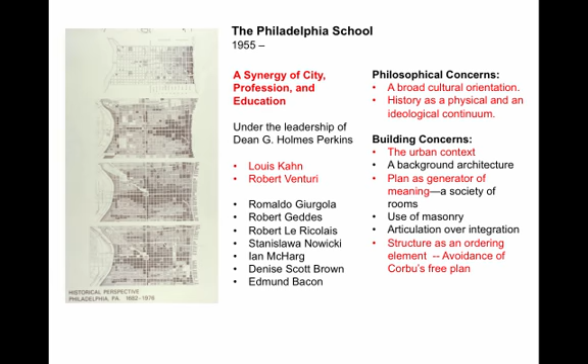Kahn graduated in 1924, just when the Beaux-Arts was fading. He was totally not exposed to modern architecture, never mentioned in school. But one of his classmates was the first American to go to Europe and work for Corbu, and brought back all these books. And so Kahn says of the 1930s, I lived in a city called Corbu. Now, after he graduated, the country entered the Great Depression, and there was not a lot of work. So Kahn is a very late bloomer, and his early buildings were extremely undistinguished.

So he had a Beaux-Arts education. The principles that you understand from the École des Beaux-Arts adopted for American schools. And we can say objectively Penn was the best Beaux-Arts school because the Beaux-Arts system worked on competitions. All the best student projects were sent to New York to the Beaux-Arts Institute for a competition, and Penn won more medals than the other schools.

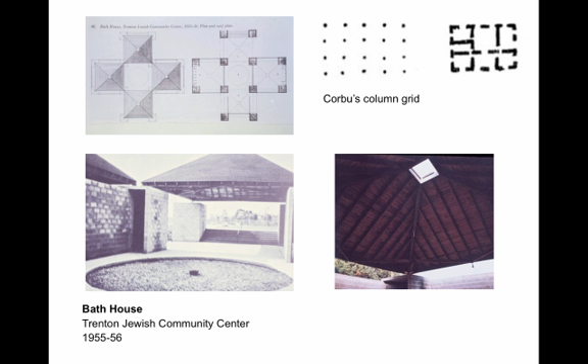So in this little bathhouse, just where you change into your bathing suit going to the pool, these forms here are the structure. They're huge and they're very defining. And then he emphasizes that definition by these pavilion-like roofs.

So, our first important building is going to be the medical towers. Now this has a very long name, the A.N. Richards Medical yada yada yada, which, forget it, it's the medical towers. And there's actually 2 wings to the building. All we need to know is medical towers, 57 to 61 in Philadelphia, University of Pennsylvania.

And here you see this articulation that we did not see in Mies. Mies is putting the skin over it, and Kahn is letting it all hang out. And we're going to see that this articulation is not arbitrary. Where does it in fact come from? So, here again is Mies fitting everything into the skin, and here is Kahn making everything bulge out.

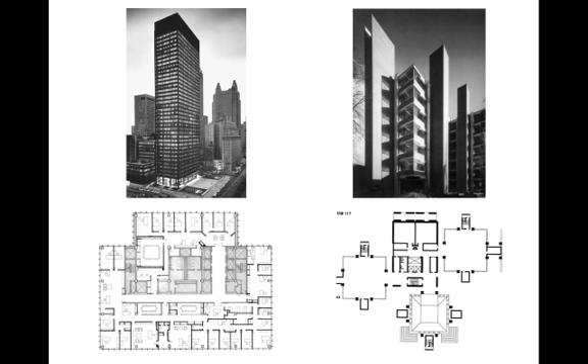Now, backing up, modern architecture stated the aesthetic should come not from the application of historical references, like sticking Roman columns on the 42nd Street Library, which is a steel building, but rather the aesthetic should come from an honest expression of the spaces, the structure, the materials, and the mechanical.

Nobody had ever done it though. This was the implied statement, and then Corbu does a tile building and covers it with stucco. So you have no idea how it's working. And Kahn says, everybody's been saying this, I'm going to actually do it.

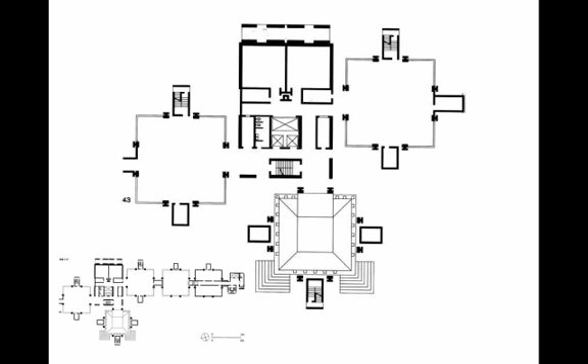So there's 2 wings to the building, this one and then this addition. We're only going to talk about this. This continues the same theme. So what we have is 3 pavilions. The pavilion on the first floor here is knocked out, so this becomes the entrance. But on a typical floor, we have 3 pavilions served by duct space, stairs, and they're all linked into a central core. So let's see how he arrives at this very articulated arrangement.

He starts by saying, what is science? How does science work? And he says there's 2 parts to science. There's measurement, where you work with test tubes and you gather information. And you want to have your lab tables, you want to have free flexible space not interrupted by columns or anything else.

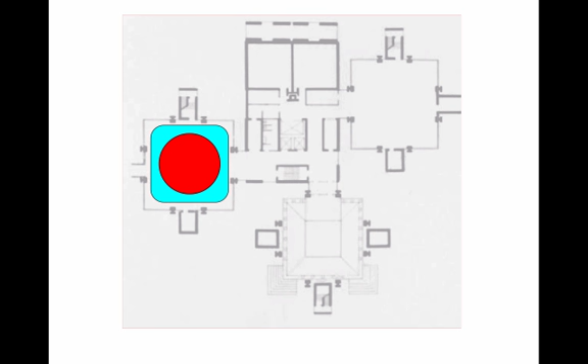But there's a second part to science. So the scientist then takes this information and goes to the light. Kahn likes to talk this way. And thinks about what does it mean and comes up with the theory that explains this data that was gathered. So there's measurement, and then there's something that transcends measurement, and he then dedicates this area around here against the windows.

Okay, so we've got our initial layout. We now need our structure. We don't want any columns inside because we want this all to be free and flexible. We don't want any columns in the corners because this is going to be open to the view. So we're going to put our columns on the third points, and then we're going to span it. So we put a member here that cantilevers out, and a big girder going across here and across here, etc. So that's our structural system, and we've arrived at this totally logically.

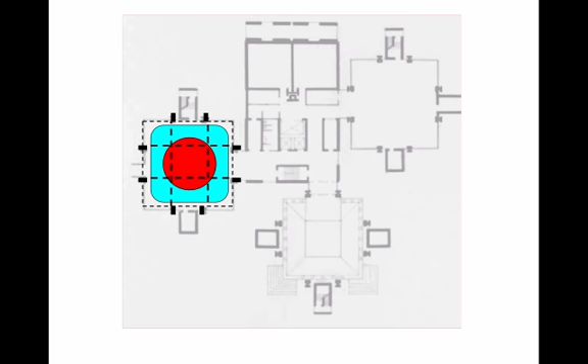Now, we need air ducts and fire stairs. And we don't want to put that in the middle the way we do in a core of an office building because we wanted our middle open and flexible. And we don't want to put them in the corners here. That's where our views are. This is what's left. So this becomes the fire stairs and the exhaust ducts, our intake ducts are here, and you need 2 fire stairs.

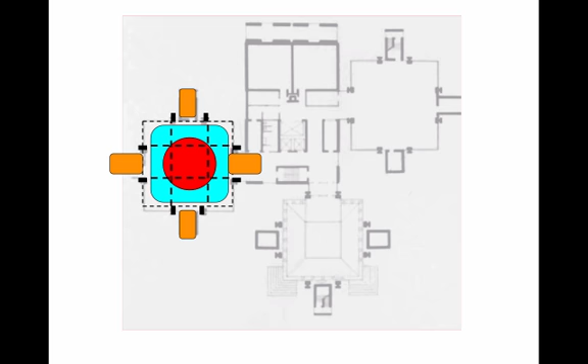There's a fire, you run out of here and go down the fire stair. But if the fire's right here, then you need a second means of egress. It's actually over here. So we've now got that, and then we actually have 3 of these addressing the square footage of our building. And we have the central services, storerooms, elevators, toilets, the other means of egress, etc. So we've arrived at this building through these very logical steps. It's not just arbitrarily putting bumps on an otherwise smooth building.

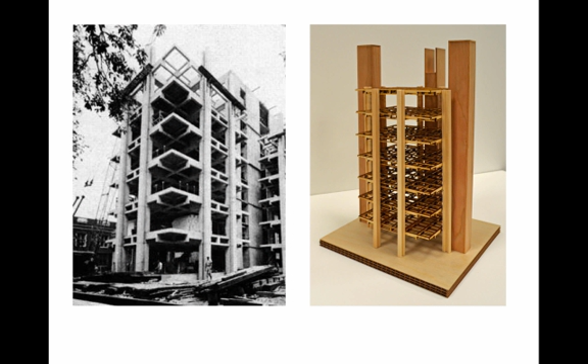Now, how's he going to build this? Well, the structure is all precast, pre-stressed, post-tensioned. So cranes come along and assemble these pieces. Does that remind you of anything? Very strong, dominant structural forms, precast and put together like giant Lego blocks. Hello, we're in one.

Right there. These are giant precast columns dropped in here. These beams are precast, they're brought in. So you guys weren't here yet, but when this place was being built, it was really wild. And it went up really fast. The structure just went right up in like a couple of weeks because it was all precast, and these big flatbed trucks come in, crane picks them up and puts them in. Finishing it off took a while longer.

That's exactly what was going on here. So here are our columns. They're in pieces, one story each. And then here are the beams that cantilever. These guys, this was a mistake. These guys shouldn't be here. He says he never should have done that. And in the next wing, he doesn't do that. They just sort of cut the span down a little bit, but he didn't have to do that.

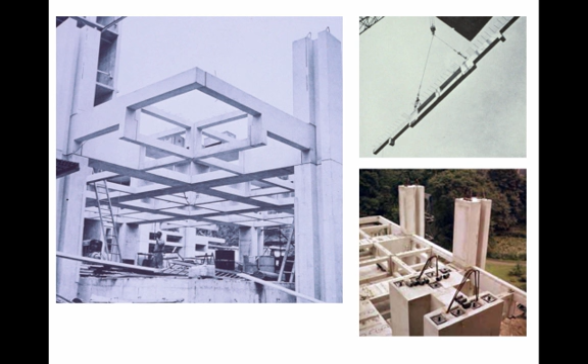And then the towers are poured-in-place concrete, and the rule is, at the University of Pennsylvania, every building has to have brick. That's the aesthetic unity, so they then have brick veneer on them, and he later is very regretful of that.

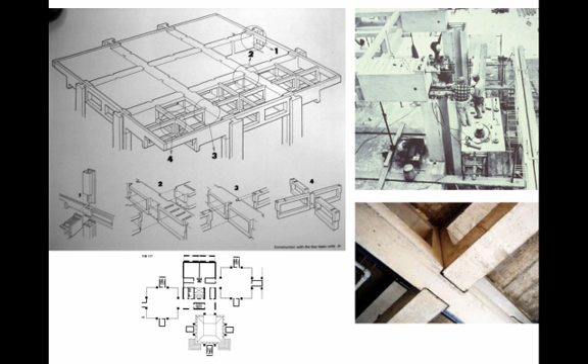So here's the crane bringing these pieces in. We drop down two columns for our next floor. We then drop down one of these guys, spanning across. We got these big girders going in, and then these little X things go in, the ones that I said shouldn't be there. Here we are diagrammatically. We have this giant girder going across, big monster. There it is. Then we go the other way.

This one has to be in three pieces. Now we got a problem. How can you have a girder in three pieces? It'll just collapse. Well, it's going to collapse in tension, and the tension is done by steel in concrete, reinforced concrete. So once these are set into place and they're held by scaffolding, we then thread the rebars into this, going across all these holes lining up. The rebars go all the way through.

And then we put hydraulic jacks on here that spin down nuts, like when they take the tire off your car, so you thread this building with rubber bands, and you pull the rubber bands all taut. That's how they made this building. Architects were coming from all over the world to watch this thing going up. And then they'd go over to see Venturi's coffee shop, also a cool architect. The engineer for this is August Komendant, who was the leading precast engineer.

Now, everything I just told you about how the structure works, every time you walk into the building, come up these steps, see this pavilion here, he scoops it out, and this is the entrance. Come up these steps, you look up, and the whole story I just told you is there. Kahn says the building is the record of the making of the building. Now, if you're not an engineer or an architect, you might not get all of this, because this is a biology research building, but Kahn believes subconsciously you will, that this will make a kind of deep sense to you.

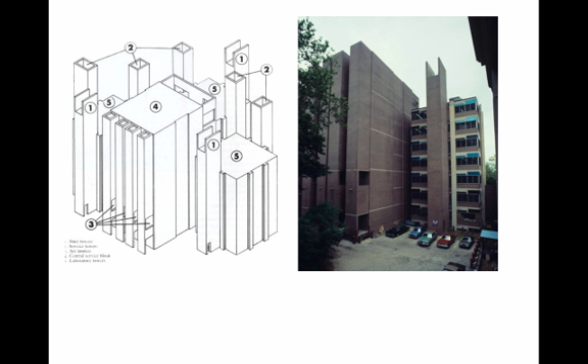Now, this building was very thoroughly studied. And three major problems came up, actually four, but start with three. Number one, scientists said, you know what? We would have preferred if this had been one continuous space. I've got part of my team here, part of my team here, I'm running back and forth. This should have all been one big space.

Number two, Kahn leaves all this structure exposed. There's no way he's going to have hung ceilings. He says, you're not going to put cardboard in my building. Dust gathers up there and filters down into your test tube.

And number three, in response to the cantilever, the structure gets thinner as it cantilevers, he opens this up to glass. Too much light gets in, kills the bacteria in your petri dish, and so the scientists are taping newspapers and aluminum foil on the glass. That is really embarrassing to an architect, taping aluminum foil in your windows. You screwed up. So a new building was built, really undistinguished architecturally, just down the walk for the scientists who couldn't work in here.

Now, Kahn became fully aware of these problems, and his next building was the Salk Institute for Jonas Salk. So Jonas Salk had developed the vaccine to prevent polio. Polio was a terror. Imagine the height of the AIDS epidemic. That's what the polio epidemic was like. And mothers were scared to let their kids go out in the summer to get polio, and then you'd be crippled or even dead.

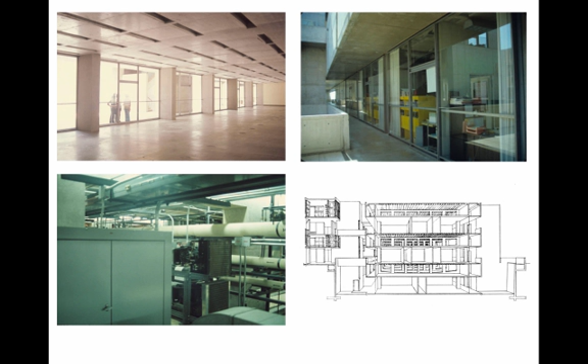So this is what the laboratories look like. Here are columns, giant Vierendeels above. And this lab floor is right here. And then the mechanical floor is right here. And here's a little piece of this Vierendeel in there, this guy here. A Vierendeel is vertical instead of diagonal. Should have got a better picture to see more of this. But you can see all the backup stuff stuffed in here that you need in a lab. And then this wall is floor-to-ceiling glass.

And then the light coming in, this walkway here overhangs the laboratory. See it overhanging. So that shades the sunlight so it doesn't get into the lab. So he solved, and finally, let's go back here. These two buildings, the medical towers and this one, are the exact same square footage. And so he's got 1, 2, 3 times 2, 6 lab floors where he had 21, or 20 if you take out that entrance in the other one. So these lab floors are 3 times as big as they were in the other building. He's addressed all of the complaints. It's really great when you get a do-over as an architect.

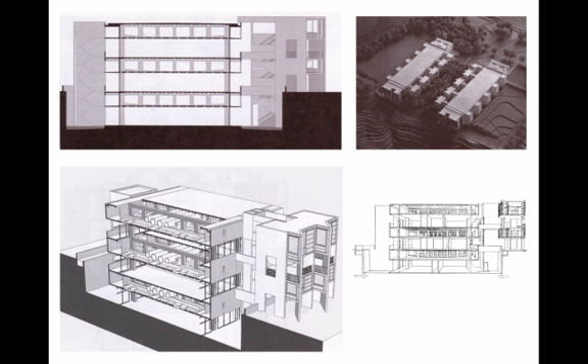And then, very famously, the Mexican landscape architect Barragán was supposed to do the landscaping for the courtyard. He came and he said, just leave it. It's a reflection to the sky. And so it's just a band of water running down the center, and here's the Pacific Ocean.

Now, Kahn uses the terms form and design. Form is the underlying order of something. It's not shape. Design is the shape. So form is universal. Design is circumstantial. Design is, okay, what's the site like? How many square feet do we have?

Now, the circumstances might be so restrictive that this form ain't going to work. We've got to get another one. But usually Kahn starts with the form, the organizing principle, and then makes it work with the materials, the site, and the other circumstances. The medical towers and Salk are totally different designs. They are the same form.

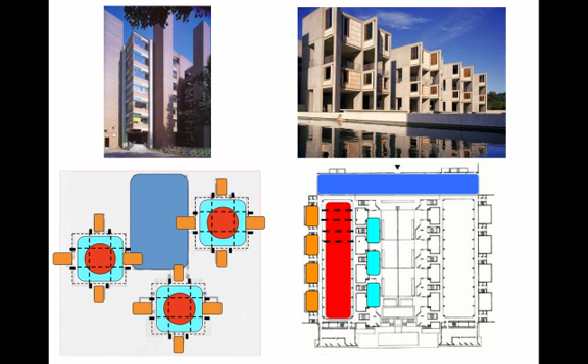So here is the scientists in the laboratory, going to the light to work on your theory, now in these little offices. The mechanical stairs and air ducts. And then the common stuff they all share. So these buildings share a form, but they have different designs.

Next building we'll look at is the Kimbell Art Museum in Fort Worth, Texas. And here, Kahn adopts a B, C, D, C, D, C, D grid, and gets a series of vault forms. I'm not going to use the word vault because that's a structural term, and structurally they're not vaults. Very famously, they have a slit running down the top to bring light in. We'll see how that works in a minute.

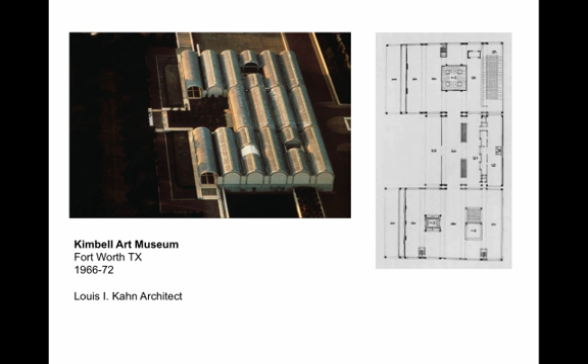So this is an art museum, and throughout his career, Kahn was very inspired by Rome. But he liked the idea, you come in and there's all the art. So you have this much concession to the lobby, and then bingo, right when you're there, you start seeing the art. Very powerful use of materials, cast in place concrete, infill with travertine.

Now, this is not travertine structure, it's masonry block with travertine surface. So it's travertine, space, block, travertine. You always need a space in a masonry wall. The roofs are covered with sheets of lead. These very primal, powerful materials. And he wants to show us the bolts that held the formwork. Architects would typically want to cover that over, and Kahn wants to leave those exposed.

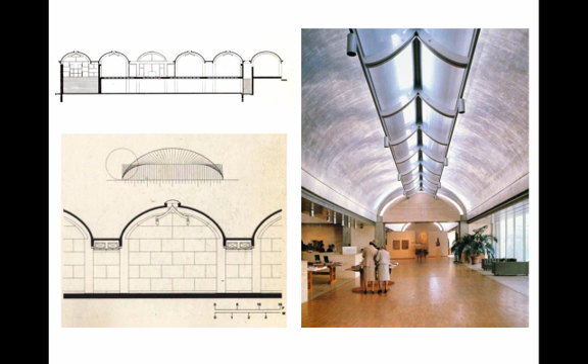The vault shape is a cycloid. A cycloid is what you get if you take a bicycle wheel and put a bright light on it in a dark room, and then roll the wheel, and you will get a cycloid on a photographic exposure. And that turns very vertical, so it's good structurally. It brings the structure down, minimizes outward thrust.

And here you see he's alternating a people space, and then here is a mechanical space. So he's using these alternating forms to get his mechanical in here. Here are the air ducts, which then let fresh air in here. He wants natural light, but you can't let ultraviolet touch a painting. It'll eat it up, bleach the pigments. So here's the ultraviolet filter, light comes in, hits this reflector, and is washed down this concrete interior cycloid.

And Kahn has exposed, poured in place concrete here. Typically that looks like sidewalks. And this is supposed to be an elegant museum. So Mrs. Kimbell, who had written the check, comes during construction and looks up and says, "Oh my God, we got an ugly building." Because you never know, some architects just repeat their things, so you know your building is going to be the same as the last one. Kahn's always doing something totally new.

And the moment they put these reflectors in here, it's aluminum with perforations in it. So some light comes through the perforations and some gets reflected and washed down. It just looks absolutely beautiful. So it really worked. Now, a couple buildings I'm not going to talk about other than to say you should be aware of them.

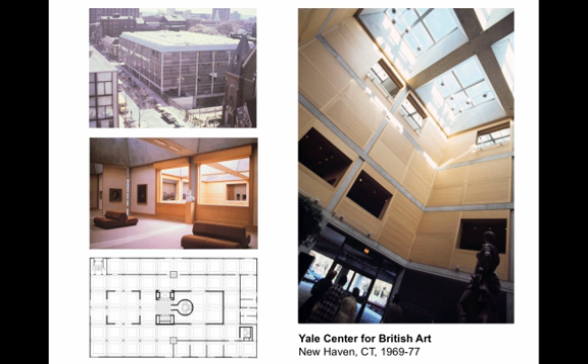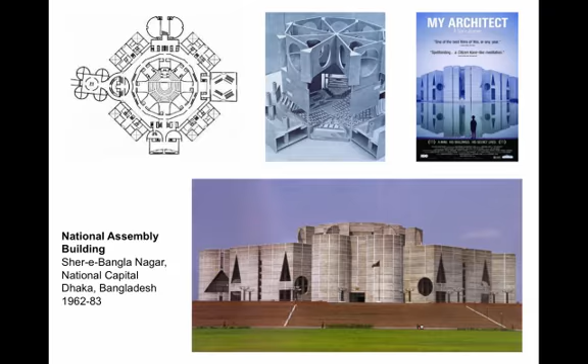So, our takeaway for Kahn's buildings: a rejection of Corbu's column grid, a plan as a generator of meaning. The rooms are in dialogue with each other. Where you put the rooms is a statement about the relationships to each other of the activities in those rooms. The structure is a giver of order. The structure doesn't only hold up the roof, the structure provides the order for the building.

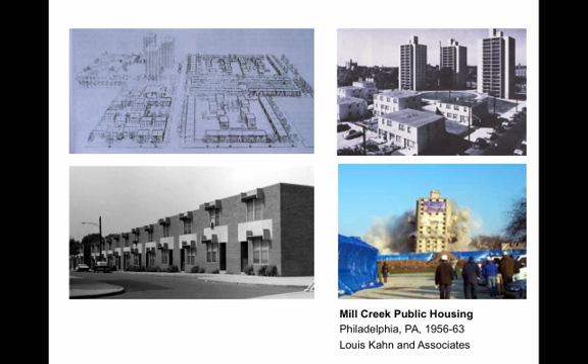So brick, then block, then space, then brick. So I spent a day with the engineer who oversaw a major rehabilitation of the building. They had to change the flashing. It was a huge multi-year project because the building's 50 years old. And he says, today we want it brick, space, block, brick, because the space is where you collect and get the moisture out.

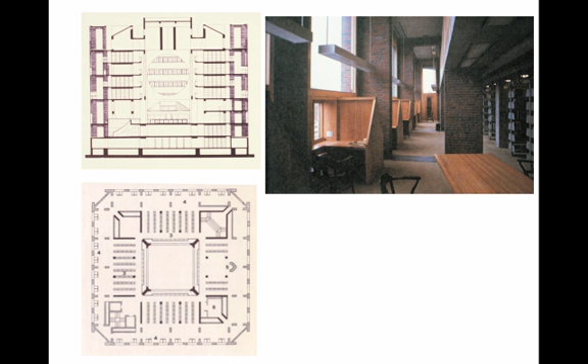It's a brick building on the outside, concrete on the inside, and every surface you touch is wood. You never touch brick or concrete, with one exception, the main stair, and there you touch travertine. So here's all the wood for where you would be leaning on here or going, looking into the courtyard. So the building has a central court surrounded by the bookshelves, protected from the sunlight, and then around the outer edge are the study carrels.

And everybody who photographs it goes here, and the student has their own, and they've got it taped up with pictures of friends and animals and all kinds of notes. And so the photographers always take that off to photograph it, but it's really cool. And so here's your little study carrel tucked in here. And then here's this giant window above lighting the space and your own little private window. And this is a sliding wood shutter. So the sun starts coming in, you can just pull the shutter and cut it off.

And then the outer material is brick. So this is brick, this column is brick, and the span from here to here is brick. Then when we come in, he shows that hatched. Then when we come inside, it is black, because that's concrete. So it's a concrete building sheathed into a brick building. It's like a double donut.

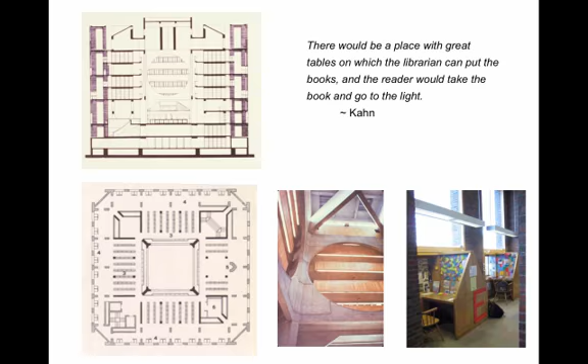And Kahn starts by saying, in a library, there would be a place with great tables on which the librarian can put the books, and the reader would take the book and go to the light. Here's one of these study carrels with all the stuff stuck up on here. The photographer didn't take them off. Okay, where does architecture serve? Does architecture serve social and political policies? Or is architecture the manifestation of institutions that are the embodiment of human desire? Leave that for you to think about.

So to wrap up, Kahn's philosophy. Kahn was a very powerful philosophical mind, and there's a lot of ways to attack Kahn's approach. I decided on this one. Start with monumentality. Monumentality is the celebration in form of a past that we value and feel is still living in us. So here is John Russell Pope's National Gallery, which is a reincarnation of the Pantheon. And it says, we in our culture today, 1938 to 41, are still rooted in Rome.

And we celebrate the Roman values. Our literature, our culture, our philosophy, our laws are based in Rome, and we want to celebrate and remind ourselves of that. So the Beaux-Arts vocabulary was Roman, which had Greek origins, as extended to the European Renaissance and Baroque. It said that we are Greek, Roman, and European in our origins and continuing in our culture.

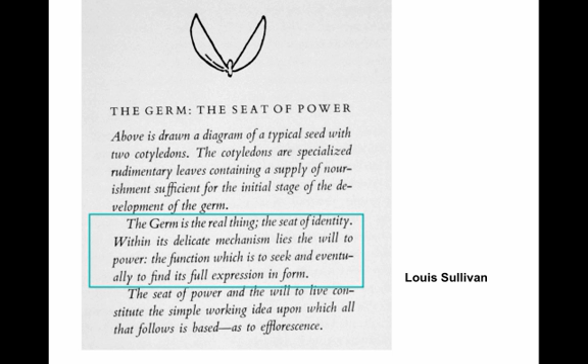This is what Frank Lloyd Wright said. What is honor? Not the rules of the code, but the nature of honor. What would be the honor of a brick? That in the brick which makes the brick a brick.

Now, this is implying a certain philosophical position, namely essentialism, which is extremely not popular in the social sciences these days. So these guys are holding essentialist positions, and you can look into essentialism and see how you feel about it.

So, takeaway on Kahn's philosophy. There are parallels to Sullivan and Wright, parallels to Platonism and Taoism, this idea that the form is in an ideal realm and is then manifest in design and the circumstances in the material world. That's very close to Plato's notion of the ideal forms.

Now in Kahn you see, I likened Silence and Light unto 2 brothers, realizing that there were not 2, nor even one. And you find almost the exact same thing in Lao Tzu and the Tao Te Ching. Archetypalism, again, this is this notion of the ideal form, which then gets manifested in circumstantialism. Creation comes from within, not from without. So I didn't really go into that, but it opens his philosophical position.